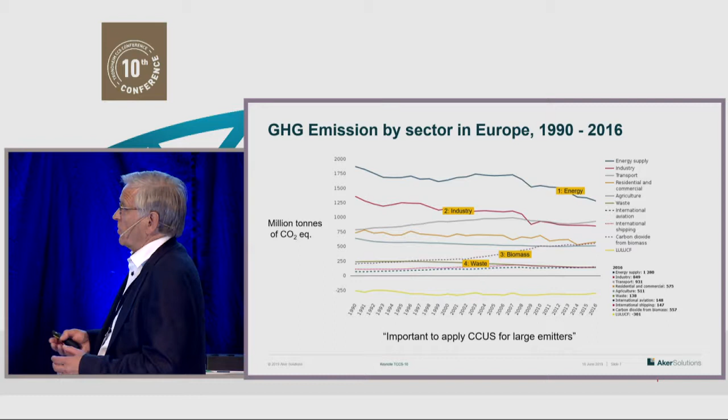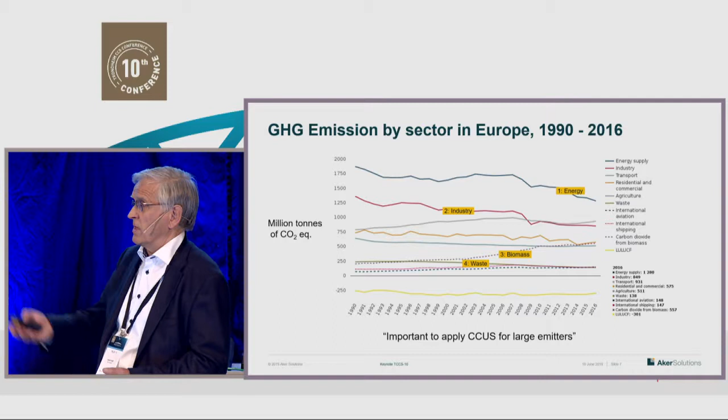And think about the energy sector. If we replace coal, that will help, of course. But if we replace it by gas, we put half of the CO2 back again. So we need CCS. And if you look at Norway, the oil and gas sector is big, so we can obviously do more in the oil and gas sector. If you look at the process industry, there are about 10 million tons of CO2 in the cement and smelting industry. And then we have about 2 million tons for the waste energy, which has been covered by Fortum today. So there is a home market also for CCS for the rest of the industry.

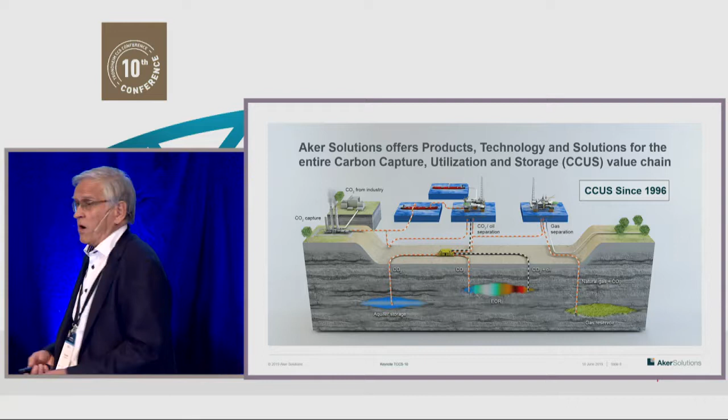Aker Solutions, we are engaged in the whole value chain. We are doing carbon capture, we have our own technology, we do liquefaction, we are in the CCU business, we do pipeline transport and liquid CO2. We are engaged in offshore CO2 separation, like on the Sleipner field. We have subsea equipment for doing CO2 injection on the seabed, like on Sleipner, and we are also in the CO2 EOR business. So we are covering the whole value chain for CCS.

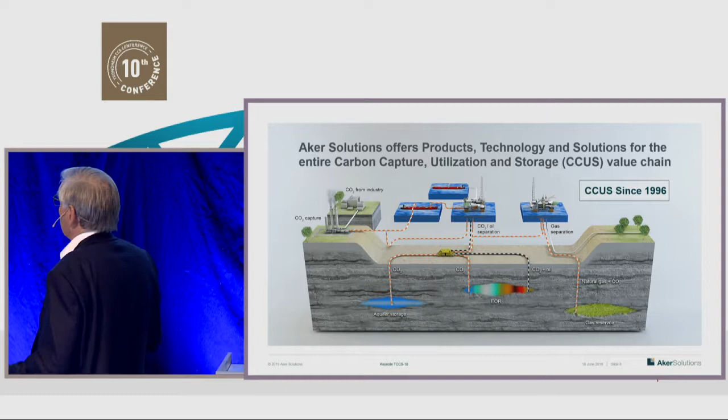Back to our technology. As you saw in the introduction from Niels today, he mentioned the SOLVit program, started up in 2008. That is the basis for our technology. It was a large R&D program together with SINTEF and NTNU here in Trondheim with industrial partners. We invested 33 million euro in the program. It went over 8 years. 50 researchers worked on the program. We tested in 6 pilots, and we tested about 90 different cocktails of solvents to find the right mixture.

So to summarize our technology today, we have a green solvent we are offering in the market. It's non-toxic, it's biodegradable, it's non-corrosive. We have reduced energy demand by about 35% from standard MEA solutions. And we have a quite unique anti-mist system, which we have tested in Alabama in the US, and we offer that as a standard in our technology, which eliminates the emissions of amines to air. So we have very good HSE performance in our technology. And we offer large-scale plants and these standardized plants, which I will come back to.

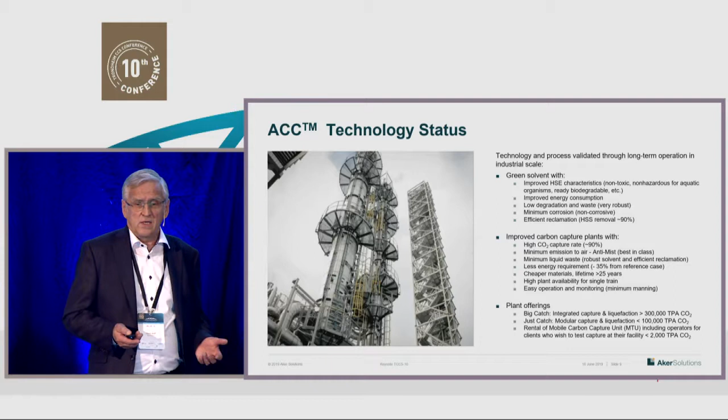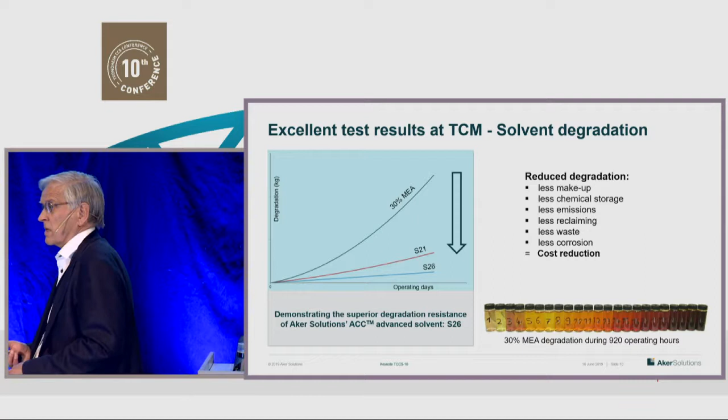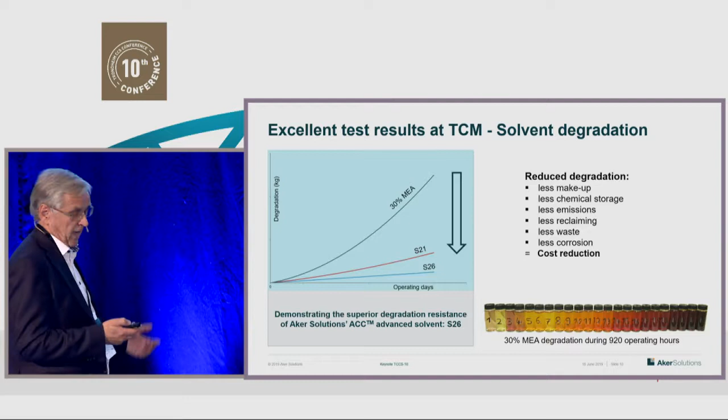And here you can see some samples from Heilbronn. It's a coal-fired power station in Germany. We tested there in a pilot. And you can obviously see that MEA is not a good option for carbon capture. So we need something else, which we now can offer by our S26.

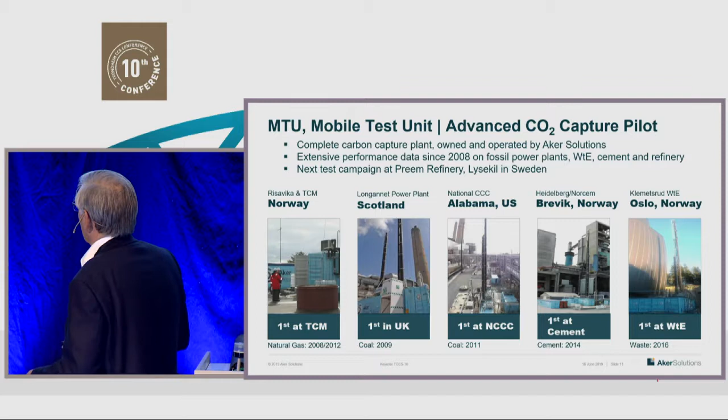We have tested carbon capture since 2008 in our mobile test unit. We have tested on fossil fuel. We have tested at a cement factory with Norcem, and we have tested for 1 year with the same solvent at Klemetsrud. So we have learned quite a lot, and we can now offer a full-scale plant for these industries.

We did the design and we delivered the amine plant at Technology Center Mongstad. This has been a success. We tested there for the first 2 years, and we are ready for large-scale, commercial-scale plants after these tests. And several companies have tested after us at Mongstad, and this has really been good for Norway to offer this as a big laboratory for carbon capture.

Today we offer 2 different plants. One we call Just Catch, which is a small to medium-sized capture plant, standardized. And the other one is Big Catch, where we do more heat integration and integration with the existing mother plant.

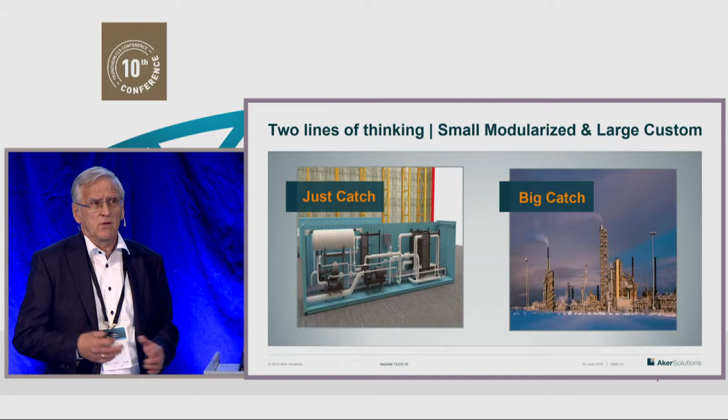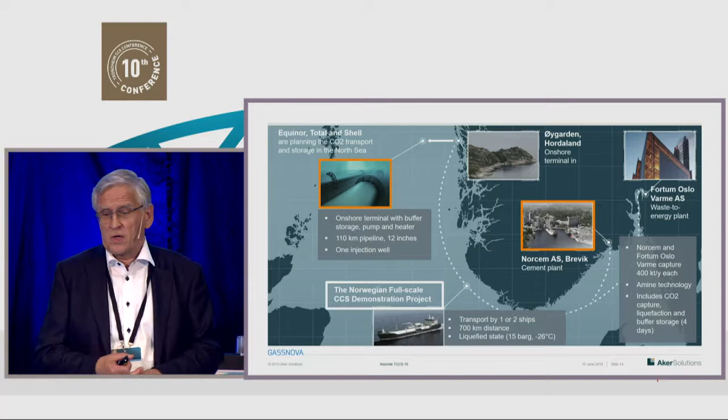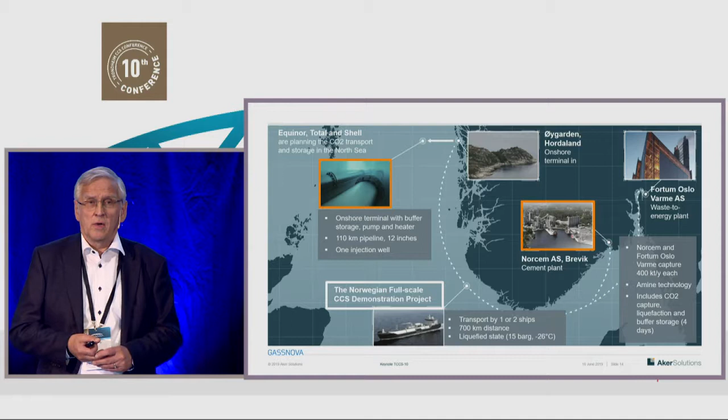You have seen the national demo project previously today by Gassnova and others. And you can see the 2 boxes where we are engaged. We are doing a front-end engineering design for the CO2 injection offshore and the control system for that on behalf of Northern Lights. And we are also developing the carbon capture plant for Norcem Heidelberg in Brevik. So I will come back to that.

And I would like to highlight that the Norcem process is a very sound project. We have a very good experience with the solvent over 18 months, which takes out a lot of risk. And it's about 20% CO2 in the flue gas, so it's low-hanging fruit. The capture plant will be more compact. And as you can see, we have designed 400,000 tons to utilize the waste heat in the flue gas. So it's purpose designed based on the available heat in the flue gas.

2/3 of the CO2 emission from the cement comes from the limestone, the process itself. And we have liquefied the CO2 and we can store it in a nearby quay in Brevik. And we have also seawater for cooling, which is a benefit. And if you look globally, cement contributes about 5% of human CO2 emissions, and we need cement in the future. So it's a good project.

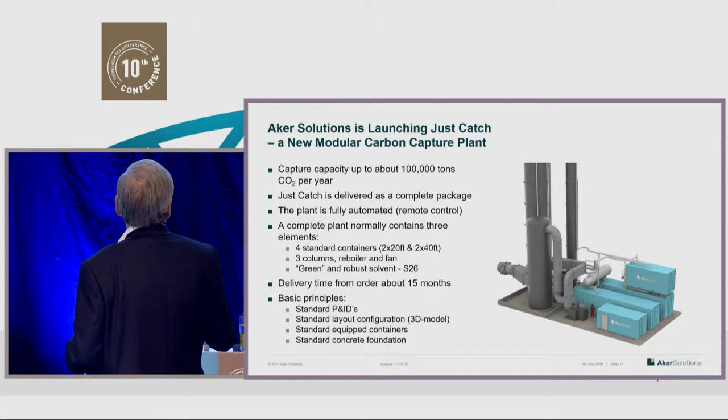Now over to this Just Catch unit, which we developed over the last 2-3 years. It's a standardized unit up to 100,000 ton capture. It's a complete delivery, fully automated. It comprises 3 process containers here, 20 and 40 feet, and this is an electro instrument control room. And these columns will be delivered directly to site. The process containers here will be prefabricated and brought into the site.

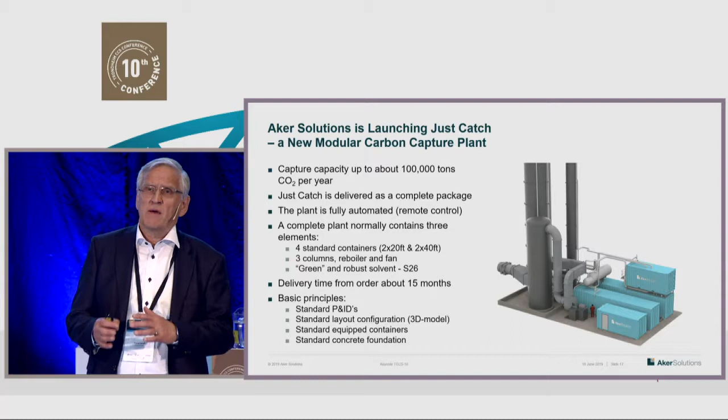And we can then cut the delivery time down to about 15 months. And of course, this is very compact, so we save a lot of materials. So this is more a kind of procurement and fabrication job, so we don't have to do a lot of engineering. That's why we can have this quick delivery.

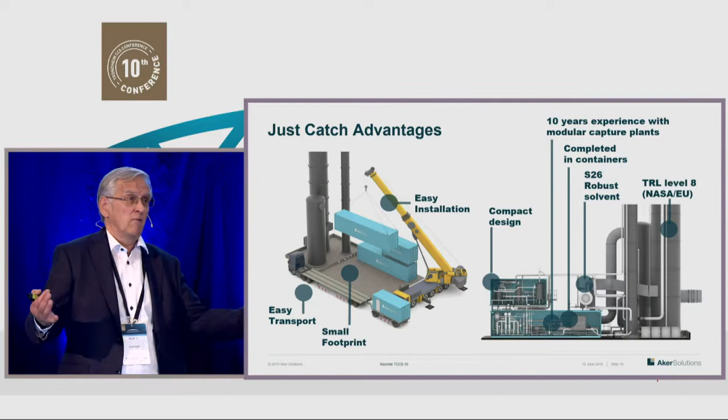And imagine if you have been at TCM and looked at the Mongstad plant. We can now bring in the TCM plant on 2 trucks, lift off 4 containers and hook up for a month, and then you have a complete carbon capture plant capturing 100,000 tons. So it's very efficient, and it has a lot of benefits. I can't go through everything, but

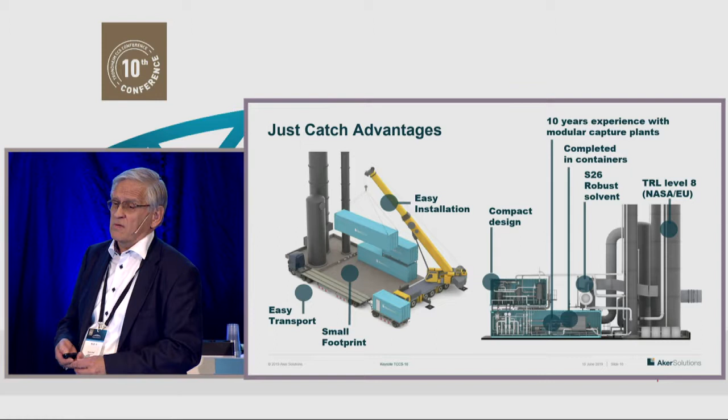it's a new kind of product in the market, and we have sold the first plant in the Netherlands, which I will come back to. So this is just to compare the Mongstad plant with Just Catch. You can see that it's 2 different plants.

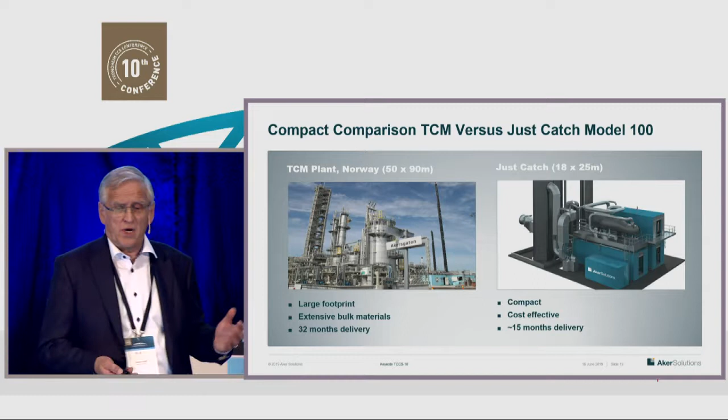Extensive bulk materials, of course, at Mongstad. It's not fair to just compare like this because Mongstad is a special plant. It's not a commercial plant. It's a test facility. But it gives you some idea of the compactness we have achieved. And at Mongstad, when you have a development project with engineering, it's about 32 months, and now we are down in 15. This is a helicopter view of Mongstad, so you can see all the savings on the materials.

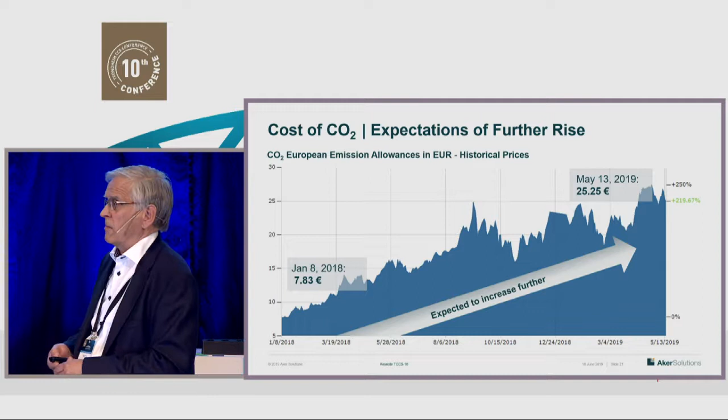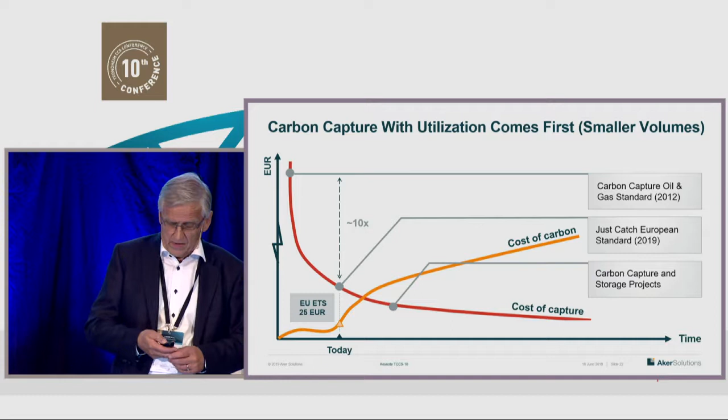We have seen also the increased interest from industry, and part of the picture, as mentioned by Stephen, is this increase in cost of emissions. We are now up at around €25. This curve, I think, is interesting. I mentioned TCM, and if you build carbon capture based on oil and gas standards, we are up here on the curve, the cost for euro per ton of CO2. And obviously, this curve is on the way down. So we have reduced the cost by a factor of about 10, but still you can see it's a way to go down to the cost for emission.

But what we see is that some of these CCU projects, like in Twence, which I will come back to, are actually going ahead. And the reason is that the government gives some support, and of course they can sell the CO2 to the user, which will then close the gap. And if we go further to include transport and storage, of course it will be more costly. But this is for small and medium-sized sources, which can then use the CO2. These will be large volumes, and CCS is the only solution for that.

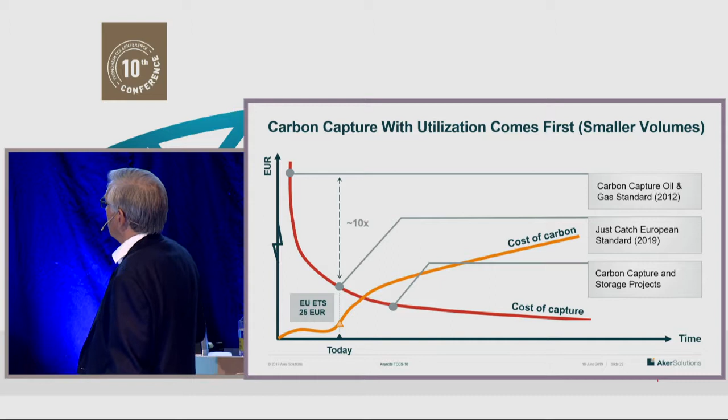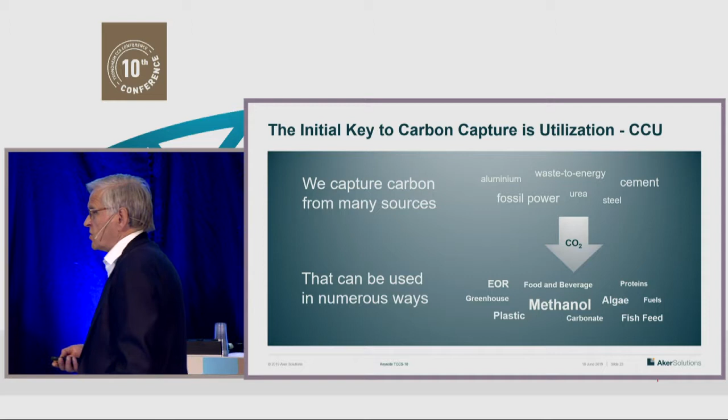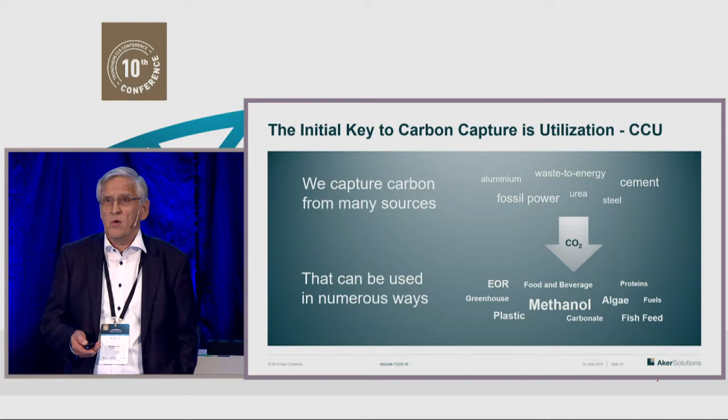So I think this CCU business is very important. And there are a lot of industries coming up, as you can see on the bottom of this slide. A lot of research and industry are now looking into using CO2 as a kind of feedstock for other products. Some of these are good also from an environmental point of view, and some have a minor climate effect.

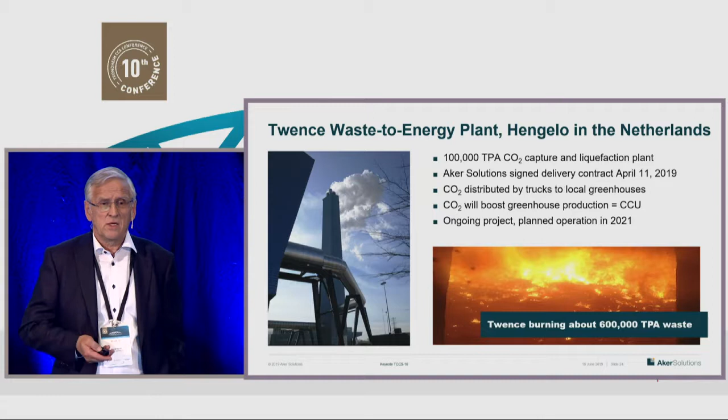And this is a good example of CCU, and I think you will see more of these projects in the near future. The project and the plant will be in operation in 2021. And we will deliver food-grade quality, so there's also this flexibility. You can sell the CO2 to Heineken or whatever. It's the flexibility.

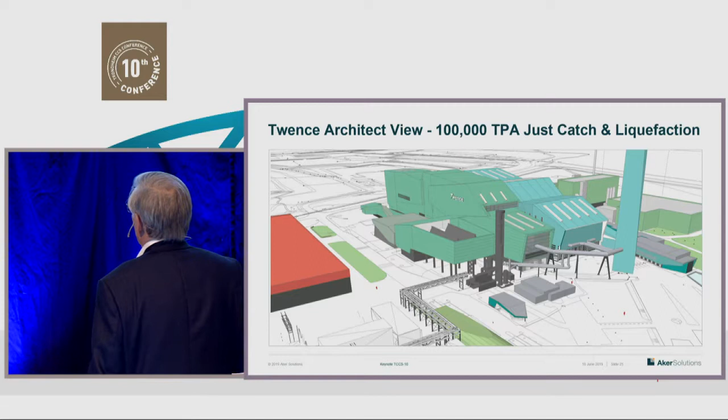This shows the plant. Here you see the Just Catch unit with the Twence plant behind here. The flue gas comes here. We capture the CO2 and we bring the treated flue gas back into the chimney. So there are no new emitting points at Twence. The pure CO2, 99.9% from the Just Catch, is going here, and then it will be liquefied. And here you see the storage tank for liquefied CO2, which will then be distributed to greenhouses.

So to conclude my presentation, I think it's now crucial that the national demo project in Norway will go ahead and that it will be sanctioned by the government by 2020. We have been waiting very long for this, and now it's the time. And it's also important that similar projects come in Europe. We have mentioned France, Germany, Holland, UK. There are many storage sites under development, so it's important to also get going on these. And this is very important. Available CO2 storage sites will open the CCS market. We see that the industry now is on hold. They are waiting for a site where they can deliver the CO2.

And another important factor is that authorities should also support CCU. That will be the early mover. We see that in Europe, and we are a bit behind in Norway, so I hope that will change in Norway. Most of the CCU plants will have a positive climate effect and will be part of this growing circular economy, which is important for the industry and workers. And I would say that the deployment of CCS and CCU towards 2050 will be crucial for the emitting industry. And as a kind of slogan for the industry, this is really the license to operate. So with that, I will say just get going, just catch it.